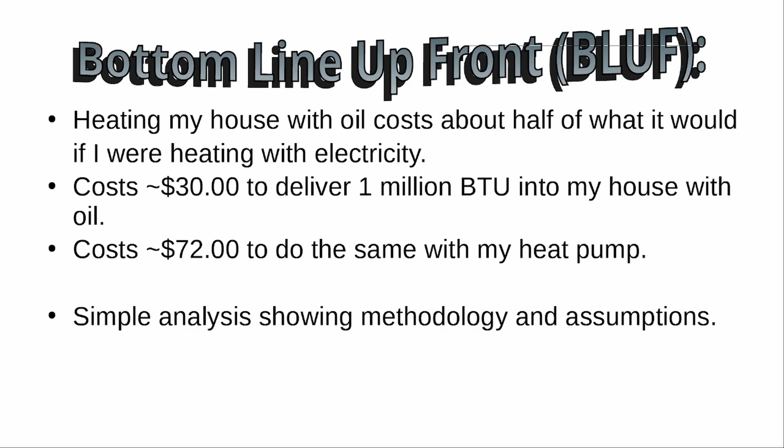I'm going to do a simple analysis, I promise, it's just algebra, nothing too heavy. I'll show you my methodology and share my assumptions, so if my numbers don't jive with what you think, you can go off and do your own analysis - it's not that hard.

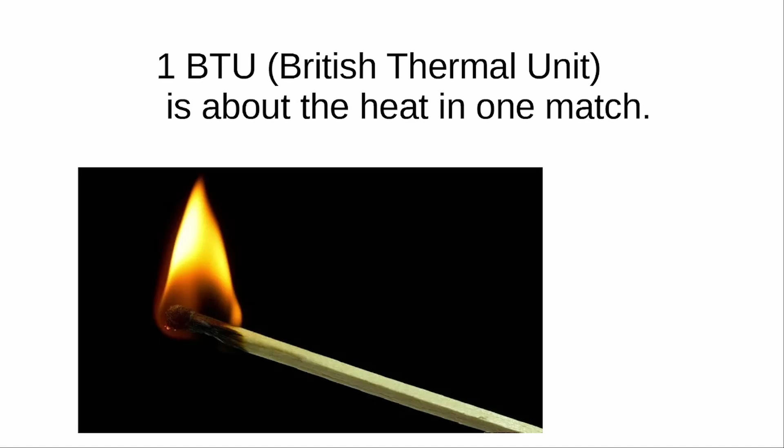First things first, a BTU, for those not familiar with English units, is about the amount of heat in one match. It's a pretty small unit of energy. I'm using 1 million because when you're talking about heating a house or doing real work in the real world, I think 1 million is a bit easier to grasp.

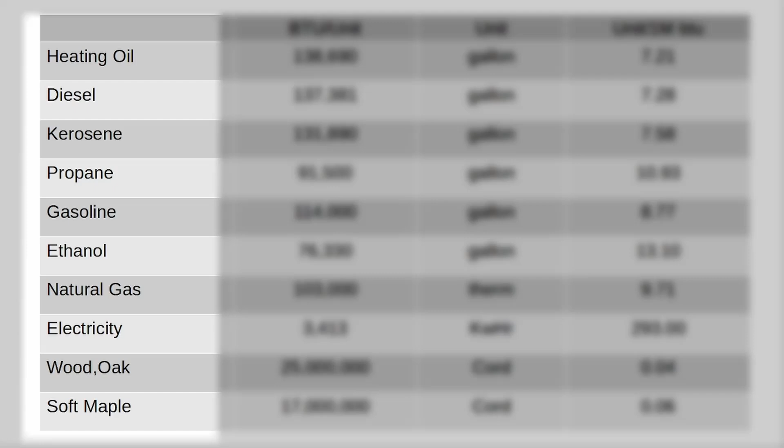I hate to hit you with a big table up front, but this is simply me going out and getting the heat content of various fuels. You just do a web search, something like how many BTU are in a gallon of gasoline, how many BTU are in a cord of wood - you get the idea. On the left hand side we have heating oil, kerosene, natural gas, gasoline, etc., all kinds of different fuel sources. The next column has the amount of BTU in a given unit - most of the units are a gallon.

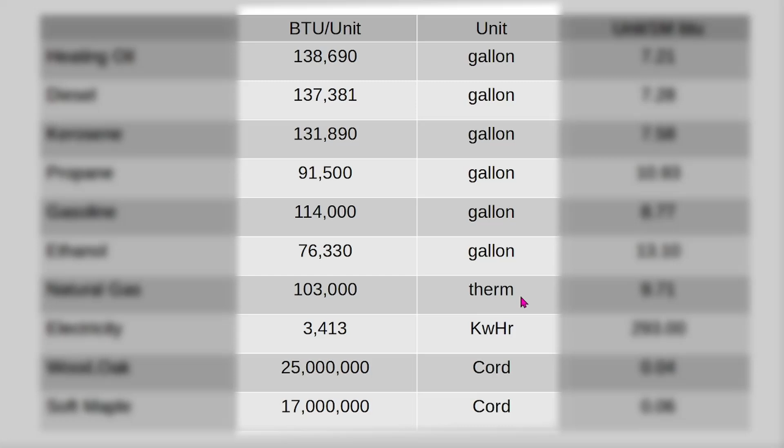Down here you can see natural gas - we measure it by the therm, and I think a therm is 100 cubic feet. I think they go with the therm because it's a more convenient unit. Electricity, of course, is kilowatt hour. Then I have two species of wood in case you want to heat your house with a wood stove - they're both hardwoods, oak and maple. The table I was reading didn't expound any further than that.

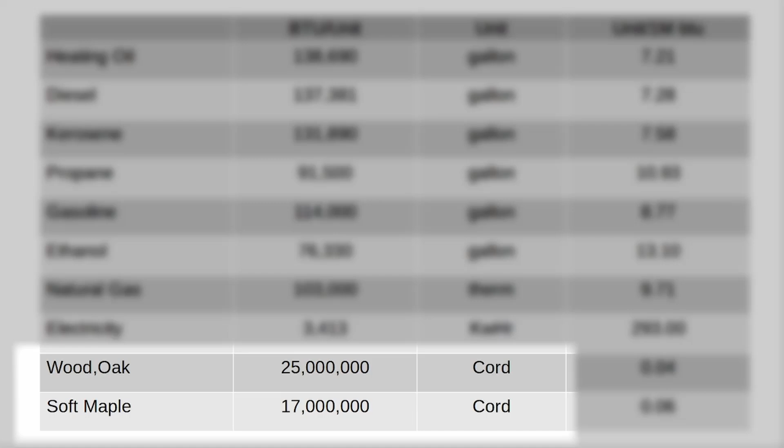But oak, being one of the harder hardwoods, has about 25 million BTU in a cord, where soft maple is a medium hardwood in terms of hardness and density, and that goes down to 17 million in a cord. A cord of wood, for those not familiar, is a stack of wood 4 feet by 4 feet by 8 feet, making 128 cubic feet of wood. When you stack wood, it's thought that about half of it is the air spaces between the logs.

Another thing to take away from this table is that heating oil is at the top in terms of BTU per gallon. Diesel fuel is very similar to home heating oil, almost the same but not quite. Kerosene a little below that, gasoline below that, propane below that, and ethanol is significantly lower than gasoline. So it's important to realize if you're running an automobile burning some proportion of ethanol with gasoline, you're going to get poorer fuel economy because the fuel is diluted with ethanol, and ethanol doesn't have the same amount of heat as an equivalent amount of gasoline. Anyway, that's a side note. In the final column, I gave you the number of units needed to get to 1 million BTU.

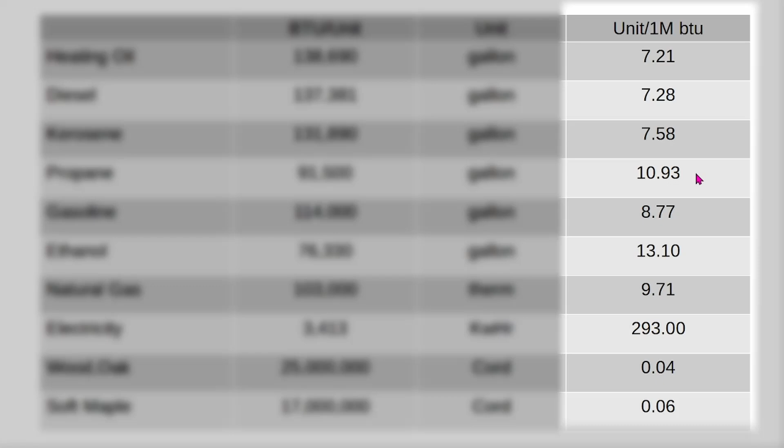So you can see for home heating oil, it's a teeny bit less than 7.25 gallons gets you 1 million BTU. For diesel fuel, it's a teeny bit more than 7.25 gallons. And you can read the rest, I won't read it to you.

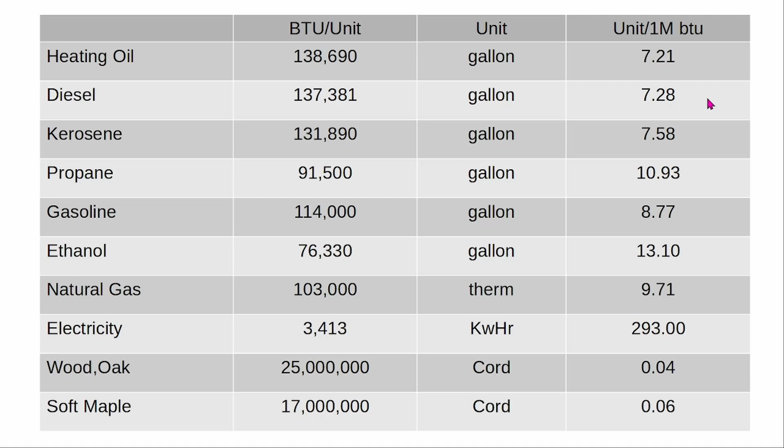Gasoline, almost 9, etc. And just to be clear, I live in the United States, and when I'm talking about a gallon, I'm talking about a U.S. gallon, which is 3.79 liters.

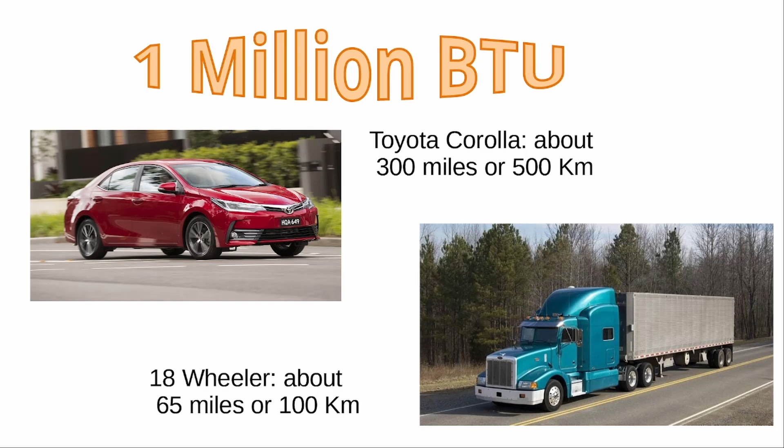And finally, to get a better idea of 1 million BTU, if the gallon conversions didn't do it for you, if you were driving a Toyota Corolla, that would get you about 300 miles or 500 kilometers. That's about 1 million BTU, give or take. And an 18-wheeler, a tractor-trailer, they get about 65 miles or 100 kilometers out of 1 million BTU.

But in terms of heat, it gets a little trickier because when I say cold, my idea of cold is probably not the same as yours. But in the United States, we break the country into climate zones. And I live in climate zone 5, which kind of cuts through the center of the country here. It's not unusual for us to have several days where the temperature is right around the freezing point. So days are a little bit warmer, nights are a little bit colder, and that can go on for a week or so. And that's not the coldest we get, but just to give you an example.

And in a situation like that, where the outside temperatures are around there, to heat a modest house, 1 million BTU might heat a house for 3 days. And of course, that depends on a gazillion things.

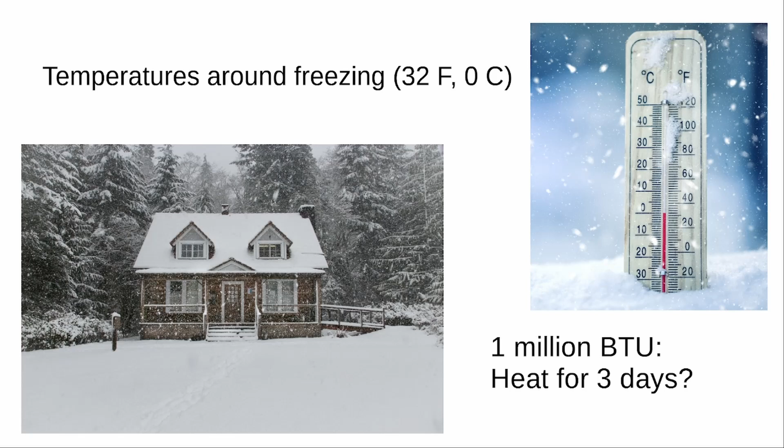And finally, to do the analysis, we need to take into account the thermal performance or the efficiency. And that's basically, you have the heat delivered to your appliance, whether it's a furnace or a boiler or other, and how much of that heat is actually available to go into your house, right? There's always some amount of heat that's lost somewhere else.

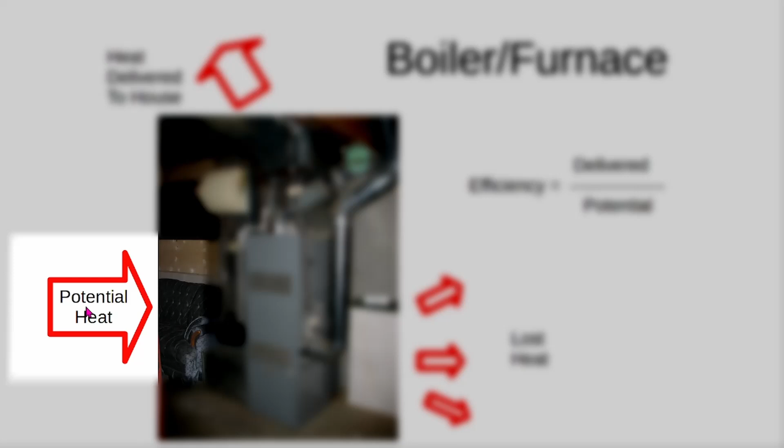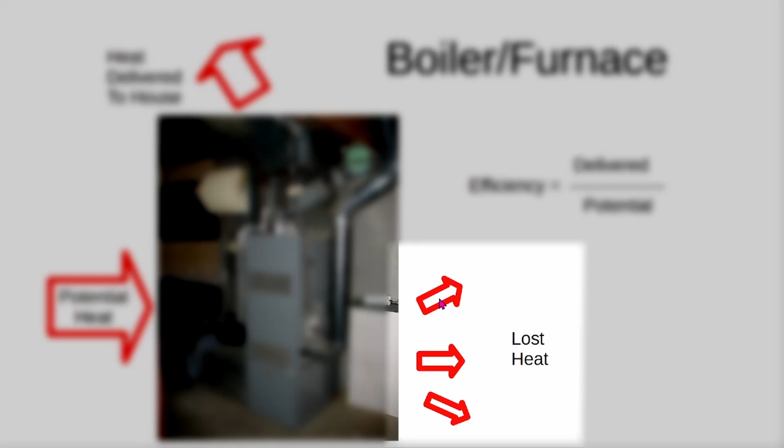And where I live, how they measure boiler performance or efficiency, the idea is over here on the left, you've got potential heat going in, right? You've got some amount of fuel, whether it's natural gas or kerosene or whatever. Hopefully the lion's share of that goes up into your house, but there's always some amount of heat that's lost, like I said. And most of this lost heat is thought to go up your chimney, assuming you have an appliance that's venting to a chimney or a flue.

And what we do where I live is you measure the temperature of the gases in the chimney or flue when the boiler is running, and you can back out the amount of heat going up the chimney. And the assumption is whatever's not going in the chimney is staying in the boiler, and that's how much heat's available to your house. So pretty simple stuff.

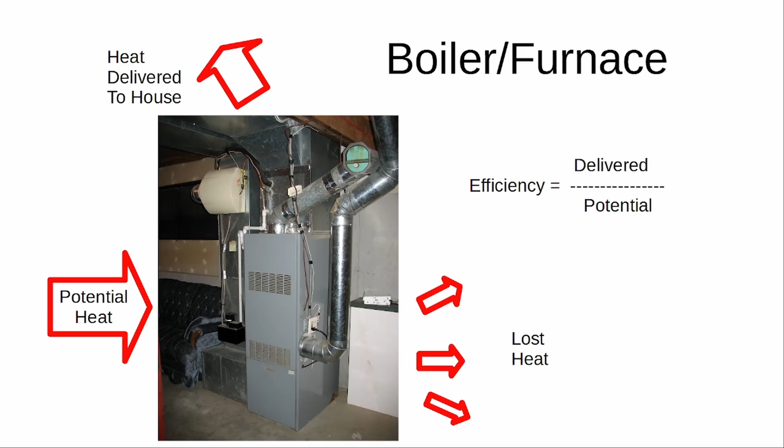And when talking about electricity, if you're talking about resistance heat, which is what you would see in a toaster element or that glowing red thing in your toaster oven or whatever, that's thought to be about 100%. Pretty much all those kilowatt hours are turned into heat. It's not quite 100%, but it's pretty close.

Some of it is lost as light. What you're seeing as red is not heat, right? Heat is actually infrared, you can't see it. And some of it is lost maybe in the switch, if there's a clock on the appliance, etc.

But it gets trickier when you're talking about heat pumps, because heat pumps don't actually create heat in the traditional sense of a furnace or a boiler. They actually move heat. And a heat pump can move 2 kilowatt hours of heat while consuming only 1 kilowatt hour of electricity. So it looks as though they have an efficiency that exceeds 100%. But again, they're not creating heat, they're not violating any laws of physics. They're just moving heat from an area where there's more heat to an area where there's less heat.

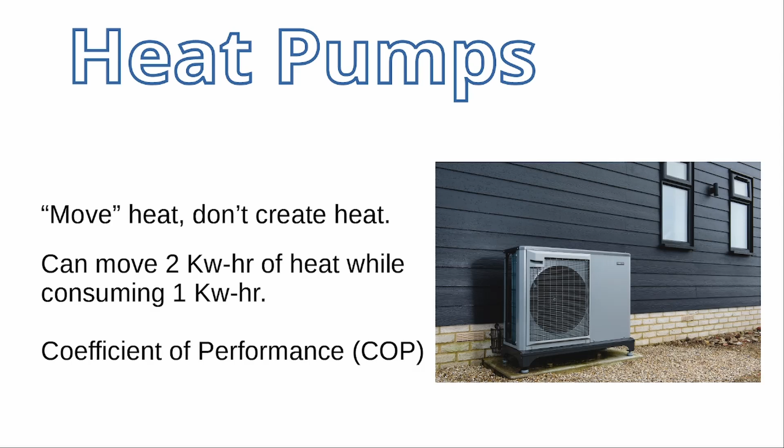And instead of calling it efficiency, they call it a coefficient of performance. And for example, your air conditioners and refrigerators are heat pumps.

The thing to remember about heat pumps, particularly air source heat pumps - here's a table, it's a little busy, but look at this line going from the lower left to the upper right. This is the efficiency, and the x-axis is the outside temperature, with the freezing point of water marked by the red arrow. As you go from hot outside to cold outside, you can see the efficiency gets worse and worse the colder it gets. So air source heat pumps perform their worst basically when you need them the most.

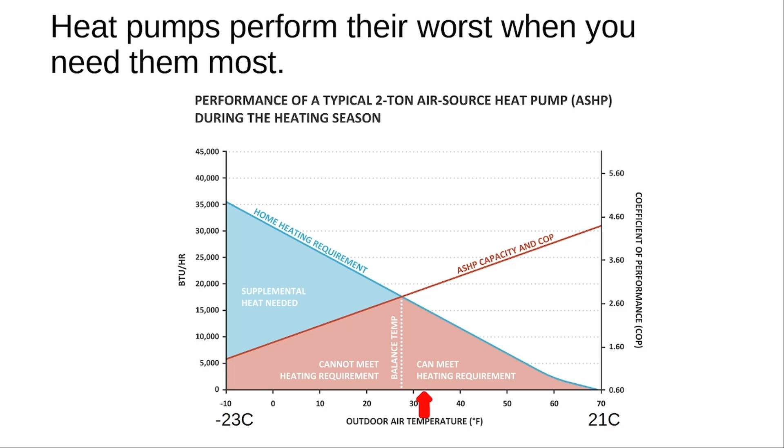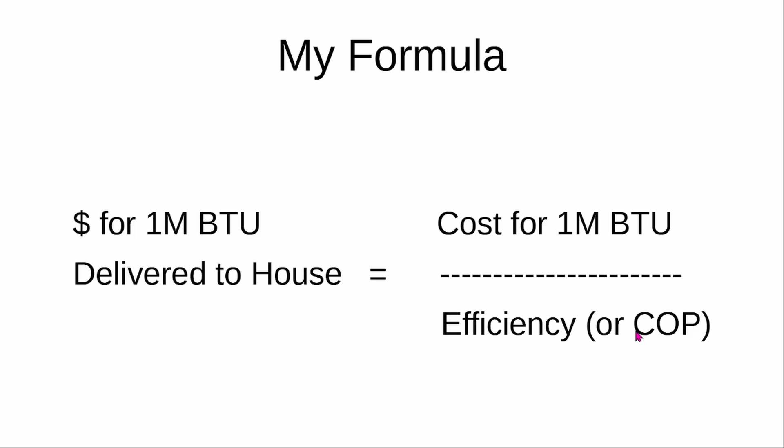It's a little different if you have a ground source heat pump. Assuming your source is infinite, you won't have this issue. So basically my formula, to have 1,000,000 BTU delivered to the house, the cost of that, I need the cost of the 1,000,000 BTU, which I showed you on that table earlier, simply divided by the efficiency or the coefficient of performance. Pretty simple stuff.

For my heat pump, I'm giving it an efficiency of 2. It's not a very new unit, and I seem to remember from the information I got when I purchased it, they listed the peak efficiency at 3, and I think I'm considerably off of the peak efficiency. So during the heating season, I'm giving it 2, might be a little better than that, I don't really know.

My oil boiler was measured at a thermal efficiency of 88%, and I'm listing 85 just to be a little more conservative. And for natural gas, if you have a furnace, it's not unusual to be up around 90%, even north of 90%. It's a little lower than that if you actually have a boiler.

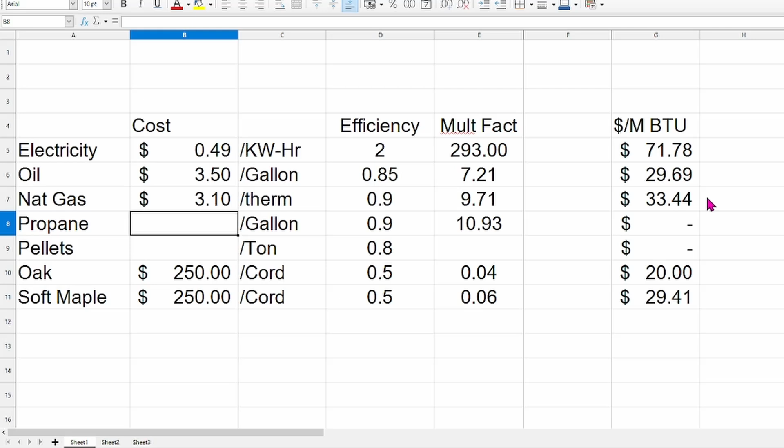When it's not the heating season, the way we bill gas is there's a monthly fee, and that monthly fee can be significant. So outside of the heating season, if you're not burning a lot of gas, if your therms go down, the calculation came out to $3.10. So let me put that in, and you can see that gas is more expensive than oil, according to my little handy-dandy calculator, outside of the heating season. And of course, wood can come out cheap, but it so much depends on how much you pay for the wood you're burning.

So anyway, that's all I have. Again, pretty simple stuff. If I didn't get something right, leave a comment. I'm hardly an expert on all these things, but I'm an engineer, and I like doing calculations like this. So I thought I'd share. And again, as always, appreciate you coming by. Stay safe, take care, and keep your eyes out for the next one.